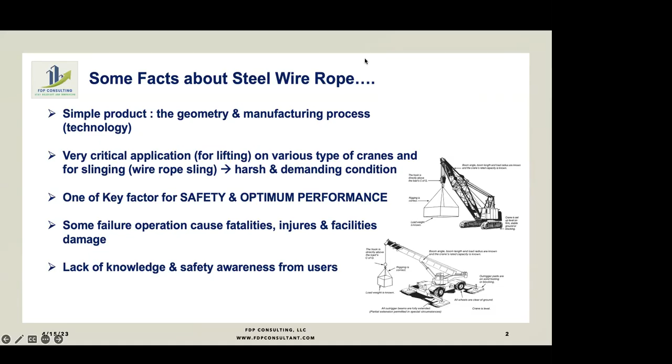Not many users appreciate that there are literally thousands of wire rope designs, divided into specific categories. This is another fact. People, the wire rope users, still think wire rope only has one diameter. Users just think they only need to know about diameter and length of the wire rope. Still many users asking about wire rope just mention what is the diameter and length they want to use. But the diameter and length required is not sufficient to describe the correct specification, correct description of the wire rope used on their units. The fact is there are so many wire designs, and there are more than 25 categories of wire rope for cranes according to ISO standard 4309, 2010.

Another fact, some international standards. All the participants, you can see there's some international standards, British standard, API, ASME. For design specification, there are also standards for recommended practice for application, for inspection. There's a standard for wire rope slings, etc. There's another standard, Australian standard, but the standards I mentioned on the slides are the ones usually used in the application.

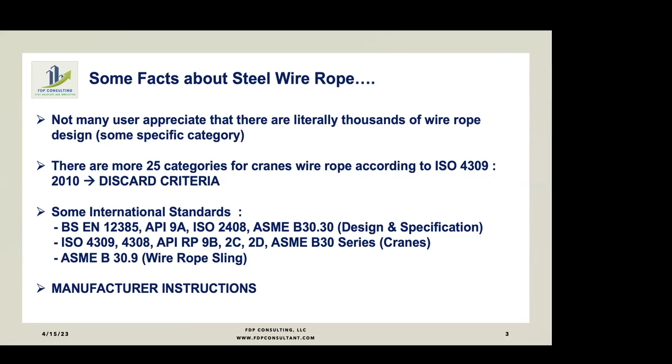...the wire rope installed on the new unit of offshore cranes is the incorrect specification. So during operation, there's some problem that happens. I will show my photo to show you that a non-optimal specification is used for the luffing crane on the offshore crane, on the well service rig offshore, but that is also stated on the manual book. So what I mean is the users must check all the correct information according to the standard. Even the crane manufacturer, at some point, puts in the incorrect specification. We still find it, okay.

Last fact, there's compromise on the wire selection and application. The fact is, on the left, strength and fatigue resistance are the wire rope properties. On the right is the list of customer requirements. The fact is, when the user selects the wire rope for their application, they must consider all these factors because they must understand the characteristics of the wire rope. They must also consider the service life the wire rope can give, what is the cost, and most importantly, the availability of the wire rope itself in the market. Because until now there's so many equipment using wire rope in their country and area, but that wire rope is not familiar in that area. So when they want to change the rope and get it from the existing dealer, it's so difficult to get the availability of the rope.

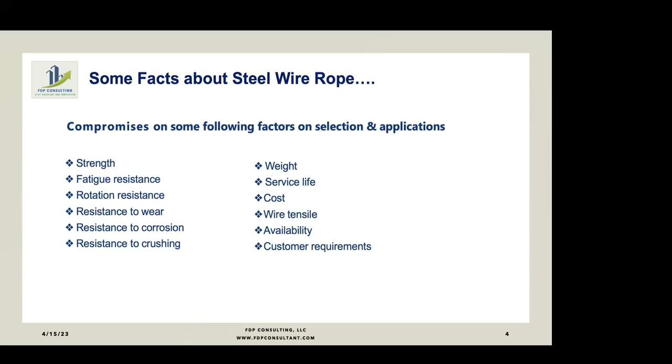That's a common problem also in Indonesia. I don't know if other countries feel the same, that sometimes there's wire on the crane equipment, but it's very difficult to get the product in the market when the customers, the users, want to repair. These are facts that still happen until now, and all these facts influence the safety and the optimum lifetime performance of wire rope.

Okay, what is the wire rope? Wire rope is, like I said, a simple product. You can see the cross section of the wire rope. The most components only consist of wire from various kinds of diameters.

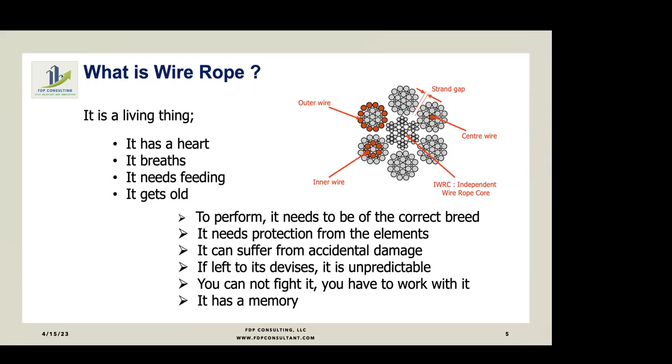Wire rope is a moving part. Consider it a moving part - internally, when used in application, it moves, metal between metal, causing internal abrasion. When the wire rope runs across over the pulley, there's also abrasion, friction between the wire rope and the surface of the pulley. After a specific period, the diameter of the rope will be reduced.

There's a gap between the wire rope strands. What is the purpose of the gap between strands? There are people thinking that this gap shouldn't exist, that the wire rope should touch each other. There's another misconception about the wire rope strands - so many people still think there should be no gap, that they should touch each other. Wrong. The wire rope needs a gap.

The gap gives clearance when the wire rope carries a load, because when there's no load, the wire rope still stands, but when the wire rope lifts the load, there's elongation on the rope, so the strands will touch each other. There's still an empty room between the strands. Because the wire rope is a moving part also, the contact will affect the lifetime.

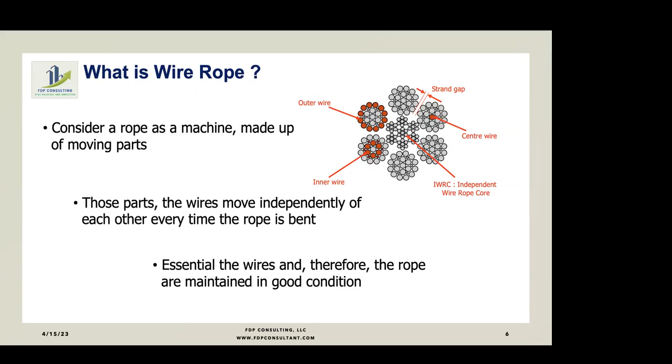The wire rope itself needs to be fit by the lubricant, because there's friction between each other. So the wire rope must be lubricated since the beginning and also during operation.

Okay, this is the simple cross-sectional wire rope. Like I said, the wire rope is a simple product, only consisting of wire - single wire, then spun together into a strand. After we make the strand, then spin again to make a finished rope.

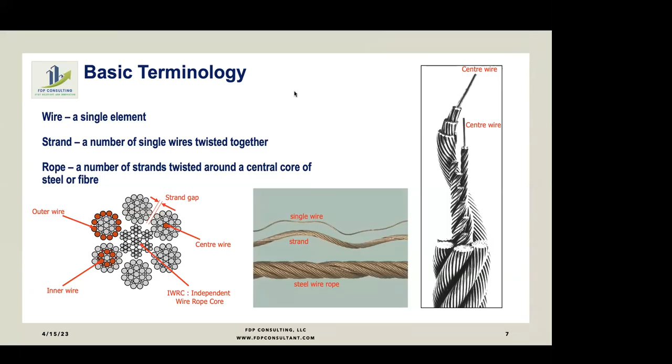So the fact is there's so many constructions, so many types of wire rope. Like I said earlier, so many users think we only need to know about the diameter and the required length without considering any detailed specification.

What is the lay length? What is the core? What is the tensile grade? What is the coating? So that's why in this session, and moving forward, we can discuss more details, step by step, about wire rope technique. From all this information you can develop your mindset, improve your mindset, giving awareness. Then at the end, you can apply wire rope with safety and optimal performance.

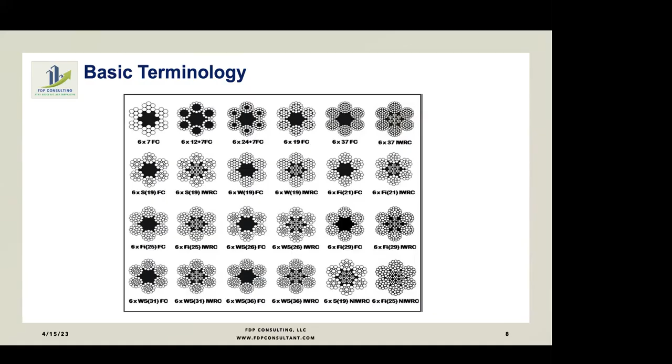In the wire rope, from this slide you can see so many symbols from the pictures, and also symbols from the notation - 6 times 7 FC, 6 times 19 FC. It has a meaning. For example, 6x37 IWRC - the number in front means the amount of strands on the wire rope, and the notation after that means the total amount of wires per strand.

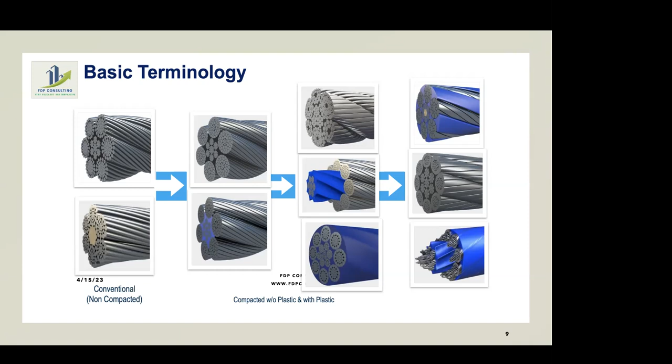This is another example from the compacted type. If we move to the right side, there's another compacted rope using plastic inside the core, and using plastic both inside and outside the rope itself. There are so many types for special applications. We can call this example an 8 or 6 strand type of rope. This other rope is usually called a multi-strand, rotational resistant strand, or low rotation rope—some people call it non-rotating rope.

You can see the different cross-section compared to the previous slides—it's very different. This rope is for a very special application, mainly for high lifting, mainly for hook of load crane ropes. Why? Because if the hook load gets higher during the rope application on the crane, this lifting operation results in rotation on the rope. The rotational effect, because the hook of load gets bigger, this rotation induced by lifting totally could not be helped by the previous type of rope, but it can be resisted by this type, which we call rotation resistant or low rotation rope.

You can see the cross section—the left one is the conventional one, and the right side is the compacted one. Again you can see the strand. You can see the difference: this one is smoother on its strand, while the left side has a round strand.

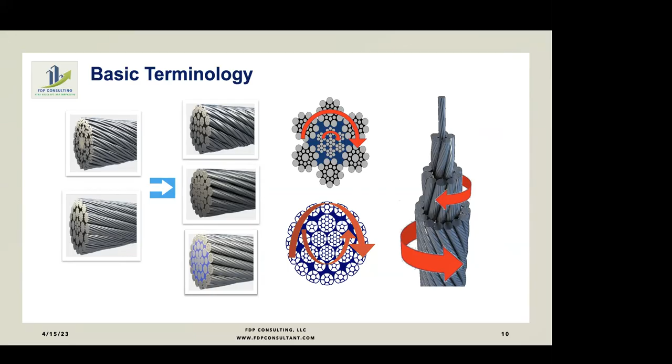Okay, the previous slides covered some basics. Hopefully it can refresh you about the many types of crane rope. What's happening on the field? I want to share some cases I found in the field.

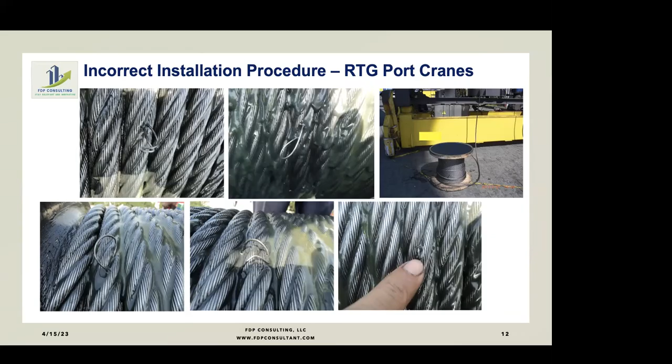So the end of the broken wire will be between the strands, and it will not influence the surrounding strands from the broken wire, and it will be safe until the rope's end of use. Yeah, so I just cut all these loops and then remove all the wires safely, no problem, and then the rope can be used until it achieves what the user expected.

Okay, the deformation of 2 1/8-inch compacted 6x26 drilling line on a drill vessel. This is another story on a new drilling vessel. A few years ago, maybe about 10 years ago, at the shipyard in South Korea. An incident happened when the drill ship fabricator installed the drilling line and then did the commissioning on the drawworks, something happened.

There was an incident. The rope broke, so they had to cut part of the rope and reinstall the rope, and they still reinstalled the deformed part. When they cut the rope, they still left the deformed part in the part they wanted to continue using, because they thought when hoisting the load, the deformed part on the right circle could be straight again.

No. Then I did an inspection at that shipyard, because at that time my company supplied the rope, and I said, no, you cannot let that deformed part continue to be used with the mindset that it will be straight again. No, that part is already plastically deformed, and that part will be the most critical one when it passes through the pulley.

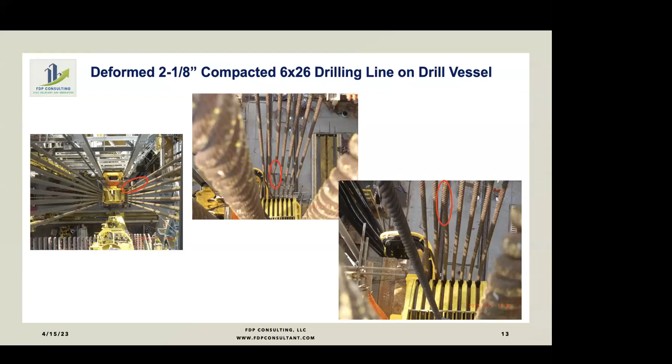For port cranes, mostly they use single-layer spooling, but for most crawler and mobile crane applications, and offshore pedestal cranes, their units should be very compact. So for the length of wire rope, the crane maker makes a small drum for the specific length of rope. The spooling must be multi-layer spooling. Multi-layer spooling is the most potential problem, mainly in the drum.

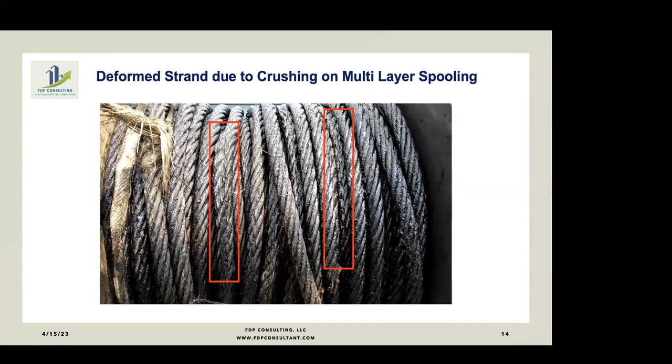You can see the damage in the red box. This type of damage is because of the interference between the ropes, and the crushing from the upper rope onto the lower rope on the drum.

Why has this happened? Because most of the end users, the owners of the port, give the maintenance to the contractor. And the contractor very often just tells the owner something good. And sometimes, from my experience, the contractors who do maintenance on this crane also don't have good knowledge about wire rope application. They only focus on checking the rope.

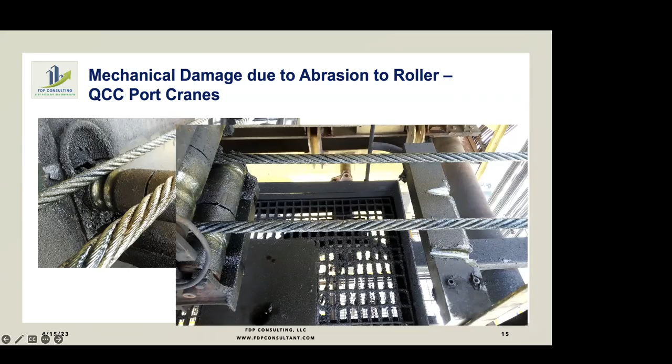So it's very clear that the crane maker didn't understand the correct specification for luffing rope application, because API RP2D also mentions never to use low rotation or rotation resistant rope as a boom hoist, as a luffing rope, or as a derrick rope. But the fact is, this happened on site. Since the manufacturer delivered this well service rig, the installed rope was already this low rotation rope. So during the operation, again, there's a mechanical problem during spooling.

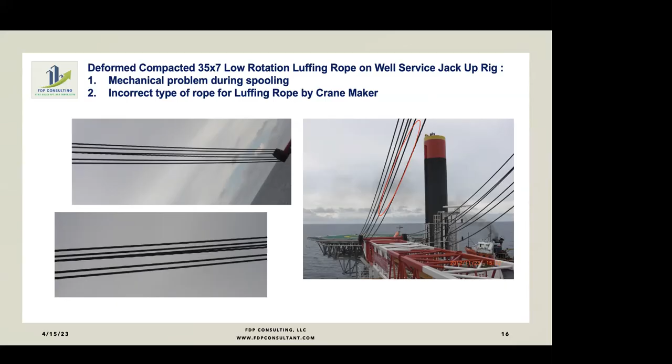Wire broken during lifting of the concrete bucket at the 12th floor of a building construction. This is the application for a tower crane. This is the incident. The tower crane was using multi-strand rope, or rotation resistant rope, lifting cement concrete on the 12th floor, and suddenly the wire rope broke. The concrete fell down, and luckily no persons were injured, only facilities damaged on the building construction. Then the user asked me to check, and they blamed the rope because it broke.

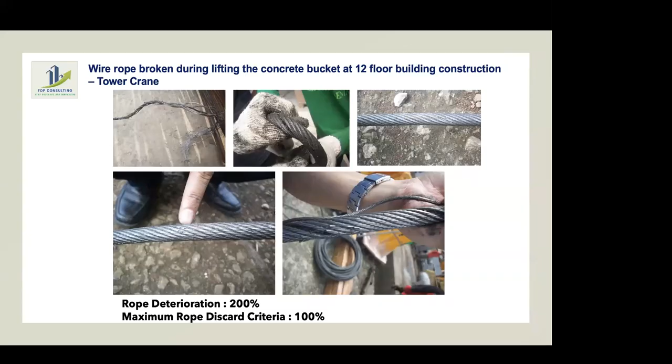You can imagine that the users must have ignored the correct time to discard this rope, but they took a risk just to continue using the rope without knowing the condition of the rope on their tower crane. From the evidence, the rope already had 200% damage, while the standard says change the rope when, based on visual inspection according to ISO 4309, it achieves 100%. This is another example of users thinking only about how to save cost but ignoring safety.

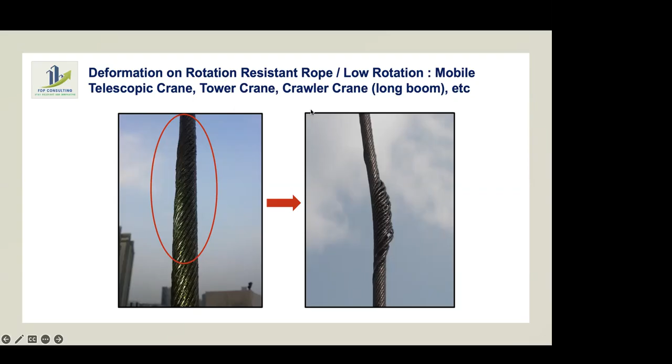Again, deformation of this rotation resistant rope. Why do I show this type of deformation happening on the rotation resistant rope? Because this is the type of rope which is very sensitive to misoperation, mishandling, miscutting. I mean, this type of rope must be handled carefully since the installation, since the cutting. When the user wants to cut this rope into two parts, you must do the proper procedure. Otherwise, you will give deformation to the rope during operation, and then make the lifetime shorter than the expectation.

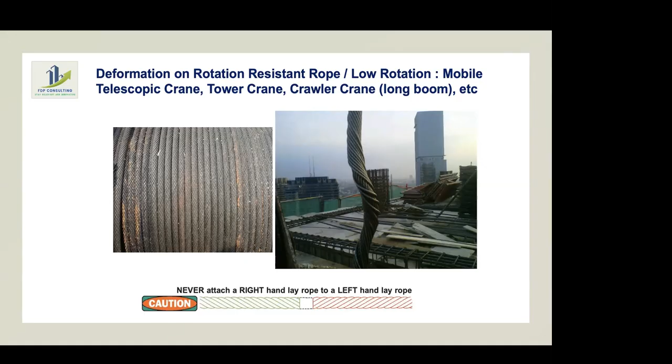Okay, this is the typical behavior of the low rotation rope, because the outer side is in a different direction from the internal part. So there is always internal bending between the outer wires and the inner wires when the rope bends over the pulley. And then it's very common that inside, if you open it, there's some marking like this.

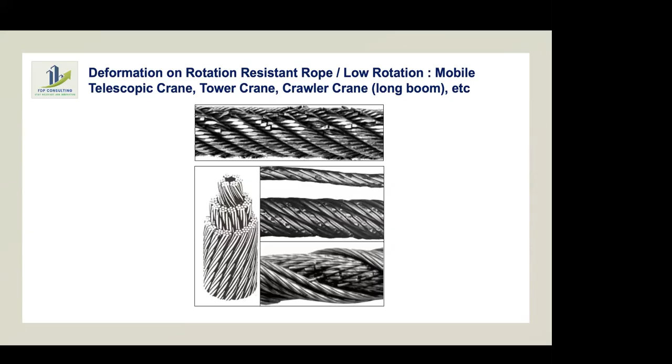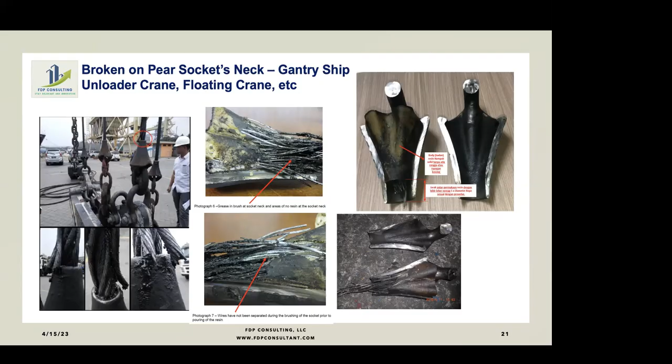Yeah. Okay. This is broken at the neck of the socket. It usually happens, caused by an improper socketing procedure, just like the example. And the right upper side is the example of a good result of wire socketing on the socket. So this is another example happening on the field. Okay.

So why do we do wire rope examination? Yeah, from the initial part, the definition, the basic terminology of the wire rope, some facts still found until now about the wire rope users, the wire rope application, and then the reality, some cases that happen on the field with the wire rope application, and then from now we must think about how important the wire rope examination is.

Yes, we are sure the wire rope examination is conducted by every user of wire rope, but the question is, when the users and the wire rope customers use the wire rope, do they do proper examination? Do they do inspection or examination according to the relevant standard? It still happens that so many users use the criteria without knowing the standard they follow, or without referring to the manual book. They just say, oh yeah, because the previous manager or the previous superintendent used the standard, we just follow. This still happens until now from my experience.

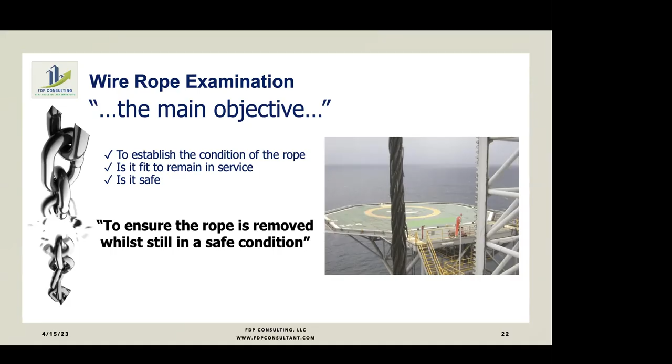To do wire examination, it is very important that the inspectors or the competent person have some important knowledge. There's a list on my slides with very complete information to be owned by the wire inspectors or the competent person.

Wire manufacturing process; the inspectors must know about legislation and standards, design and manufacturing, types of rope terminations, because there are so many types of rope termination, one of which was already explained as a spelter socket, types of rope deterioration, examination procedures, discard criteria, records and cumulative effect according to ISO 4309.

Besides ISO 4309 as an international standard reference for wire rejection criteria, there's also ASME B30.5. There is also API recommended practice as a reference for wire discard criteria. But the application depends on the regulation and instructions used in the user's industry.

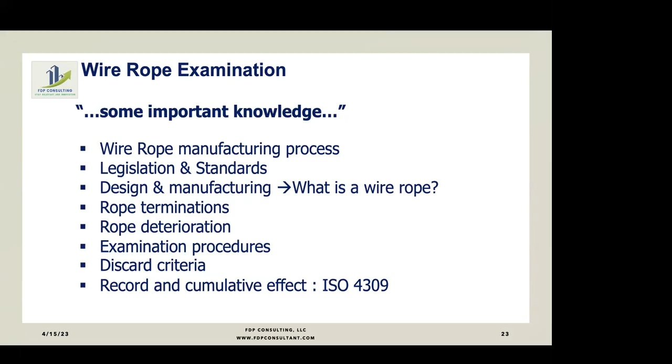What makes your wire rope safe? These are the five things I believe in, and I suggest you do these steps to always keep your wire rope safe. First, look after your wire rope during storage, installation, usage, and maintenance. And of course, these steps must use the relevant international standard. Yes, you can look after storage, but if you store the rope anywhere without considering the relevant standard, it cannot guarantee the safe use of the wire rope.

Second, check correctly daily, weekly, monthly, and replace when necessary. The users can divide the groups who do daily, weekly, and monthly checks. I always suggest crane operators have the habit of checking prior to starting the engine, prior to the operation, and also for the second shift. Always inspect the wire rope after the first shift, because after the operation the wire rope may have moved from its place on the drum. So it's very important to do a daily check prior to operation to make sure the wire rope is in its place, not displaced.

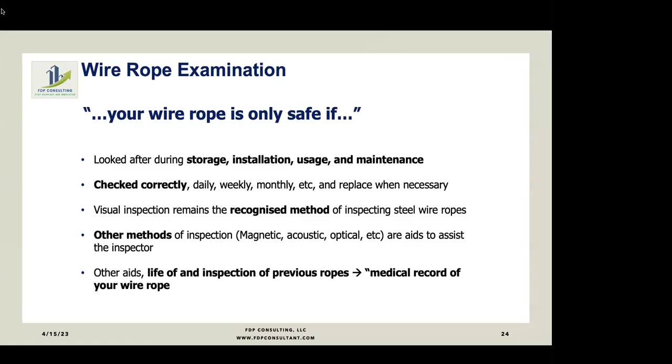So I still find so many users who don't have complete documentation, the sample or photo, at least to complete the record of the rope replacement. This is very important. If you have complete documentation every time you discard or replace, with the condition of the rope and the position of the damage, I believe you can build a safer and more optimum wire rope application in the future, because you can always refer to the condition of the previous rope to identify the problem of the wire rope in the future.

Also very important for the inspectors to know factors causing wire rope deterioration. There are 9 examples of rope deterioration: normal wear, abrasion, fatigue, corrosion, mechanical damage, deformation, rotation, and so many types and so many examples of rope damage.

Okay, so this is the end. From all I explained, it involves so many parts of the rope, so many factors of the operation, so many things that I discussed on the slides from the first until now, the factors which affect the wire rope life. I just try through this table to simplify it, to make it easier to learn for the users.

It's divided into 3 big groups: first, design data; second, equipment limits, handling and fitting; and factors about the operational conditions. You can see from the design it is about the complete and detailed wire rope specification. You can see the bold one. That is the complete wire rope specification which every user should learn and understand.

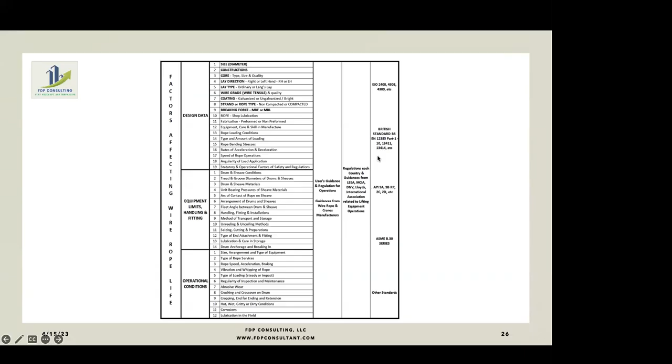Okay, and then all the factors are also relevant to the international standards: ISO, British, API, ASME, and other standards. At the end, why wire examination? This is the graph which reflects your wire lifetime.

When the wire is initially deployed to the crane, the breaking strength is still 100%. Then when the wire is in operation, the number of cycles gets higher and higher. Every user's wire lifetime should follow this graph. But the fact is, when we do wire examination, what we find is where the point of your 100% discard criteria is.

So when you do the wire rope inspection or examination, actually you're looking for where your 100% discard criteria point is. So the point depends on you. What is your rejection criteria on your site, in your application? It could be different between you participants. When you already know where the point is, the next question is, is that already optimum or not?

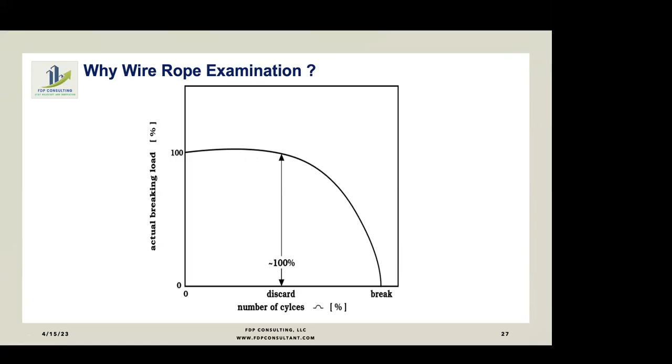Okay, finish. Thank you. Hopefully what I delivered to you, what I showed you in these slides initially, can give you general insight, just like I said earlier, that wire rope applications are so wide, so many various types. I believe we cannot deliver it all in 1 hour.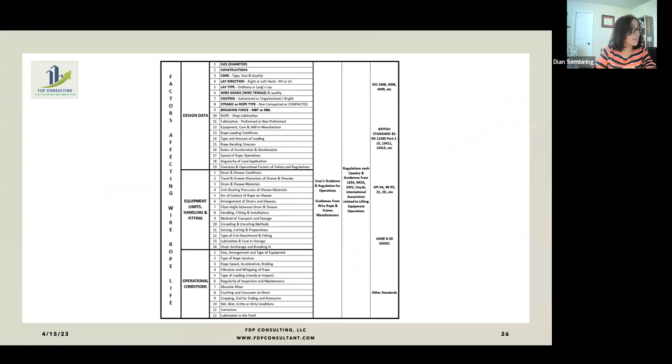Okay, I think I want to add some information for Pak Suhardono. I wrote in our chat box, Pak. You asked again, you put a snippet in our chat box, but did not mention the details. So first, in Indonesian language: alat bantu angkat dan angkut harus dilengkapi dengan label nama. I think this is not for the specific wire rope, but this is for the lifting and hauling equipment.

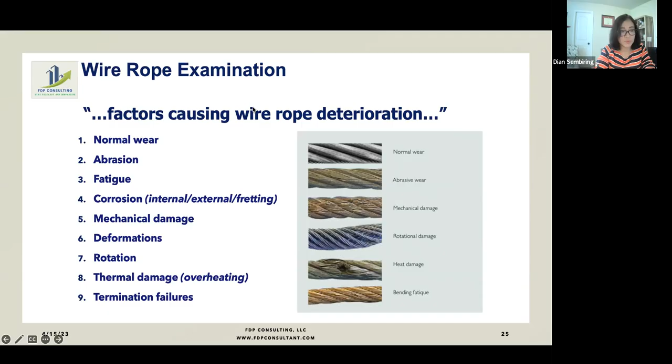That means it's the crane. It's not for the wire rope, because alat bantu angkat dan angkut, translated in English, means the crane. So crane. Yes, we have to put some information, but we said that's identification information. So for the crane itself, we can put like...

Capacity of crane, wire rope, capacity of crane, safe working load — because it's different. Capacity of crane and safe working load are different for the crane. So make sure your team understands very well what is the difference between crane capacity and safe working load for the crane, because it's totally different.

So if your team doesn't understand the difference between safe working load and crane capacity, I'm sure your operation is not safe. So you have to understand very well what is the difference. And then, date of inspection, and after that when you have to inspect again for your crane, the name of your inspector, what company you use for the inspection, what is the finding of your inspection, and what type of inspection you did for your crane, because every 6 months and every 1 year is a different type of inspection that we have to perform for our crane.

So this is for the crane. You mentioned for the crane. So you ask, do we need to use a third-party company for crane inspection? Yes, you have to use a third-party company for crane inspection. But I think that port is under Depnaker, I don't know in English. But oil and gas must be under the oil and gas ministry. So this is the difference. But for the regulation, I think it's almost the same. So you have to use a third party for your crane inspection.

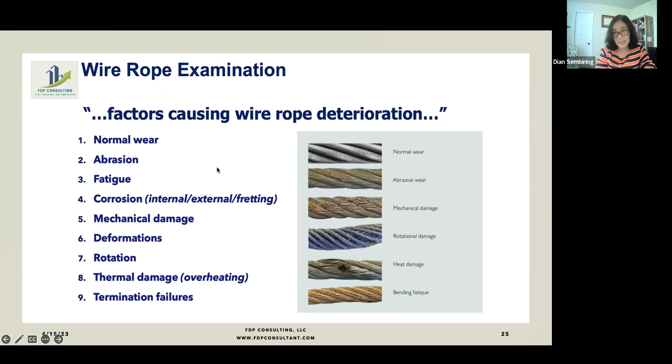But in daily activity, you have to perform what we call pre-use inspection. Pre-use inspection must be performed before and after using the crane. So anytime there's a crane inspector change, you have to perform pre-use inspection.

And if you ask, do we need a third party for my wire rope inspection? I think, like what Pak Noberto said, no need for a third party, you can use a competent person. This is for sure, but sometimes it's difficult because competent person-wise, it's hard to identify since people always change companies. So for your safety, it's better you use a third party, a company who understands very well about wire rope inspection.

So this is what I want to share with you. Do you have any question, Pak, regarding this?

On the message, on the chat, I saw about the regulation of Kemenaker. I just want to comment that from my point of view, I received this regulation, the newest one. I already read it in brief and found something strange in the content itself. From my point of view, I use this regulation as one reference. What I always do is use it as my reference, but I also use other tools and standards to compare, because to be honest, reading this regulation from Kemenaker...